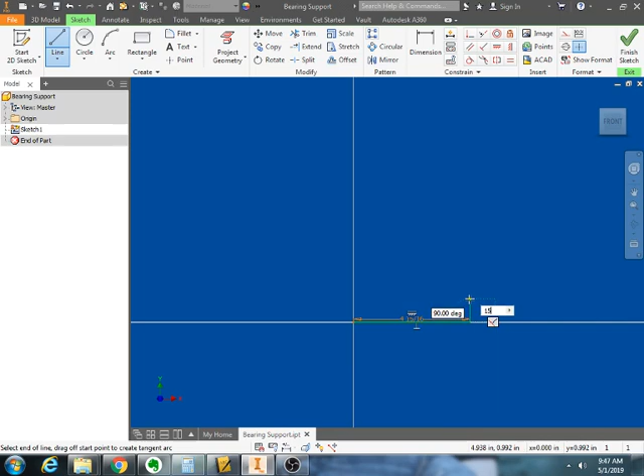I'm going to hit Start 2D Sketch. I'm going to click on this front plane. I'm going to start drawing. I always start from the center. It doesn't really matter where you start, I guess, depending on your work planes, but we're going to go this way to the right, 4 and 15/16. Zoom out a little bit. We're going to go up 15/16 and then back 1 1/4. So we're going to go up 15/16, back to the left 1 1/4, and then we're going to go up.

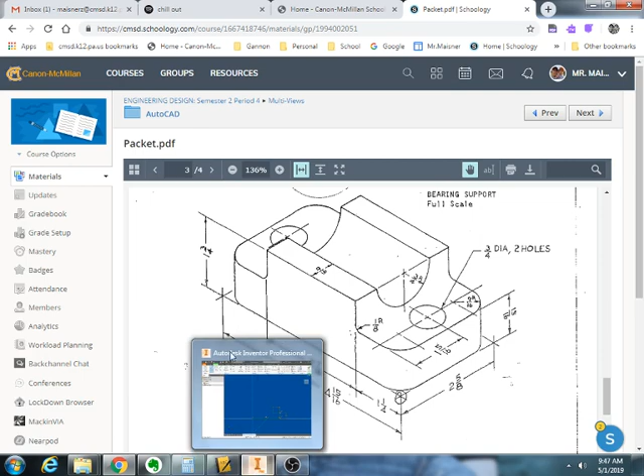As we go up, you're like, oh no, they don't give me a dimension. Well, they give you 1 3/4 here, 15/16 here. Hopefully you can do this in your head. If you can't and you don't have a calculator, Inventor does it for you. If I type in 1 3/4 minus 15/16, let's see what happens. Voila. It'll give you the measurement that you need, which is super helpful. Time saving, you know. So 13/16 is the next one.

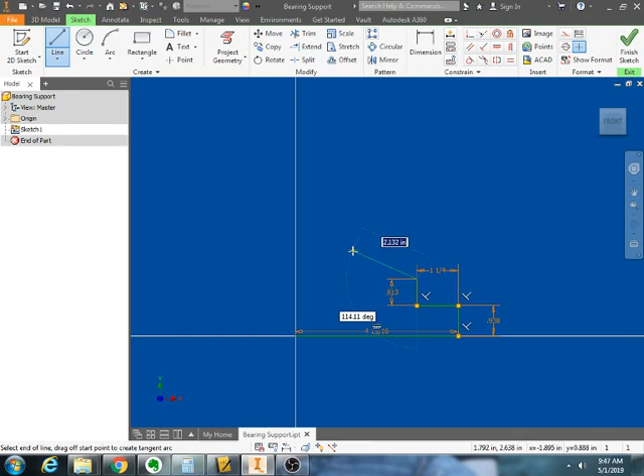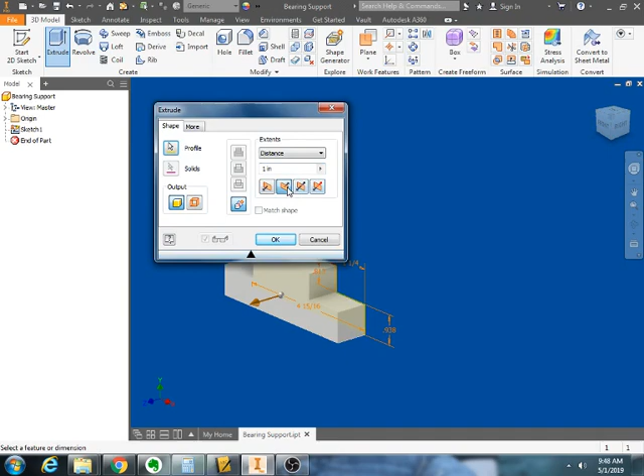So we'll go 13/16. Simply go down. Your polar tracking will stop you right here. We'll left click, left click, left click. Now I have this blocked out. I finish the sketch. I extrude the object back a distance of 2 5/8. So I go back 2 5/8. I did that kind of weird, but it went back 2 5/8.

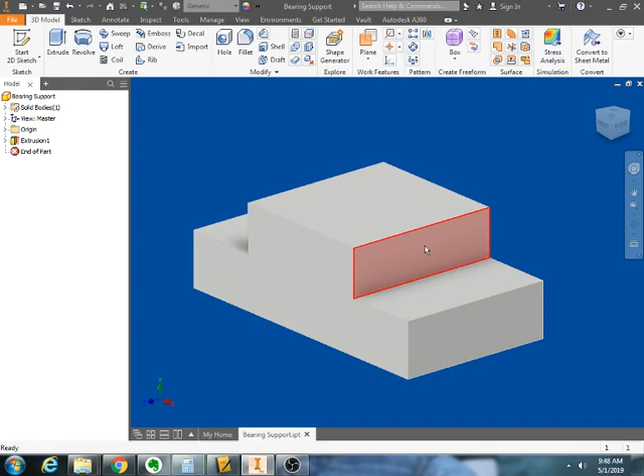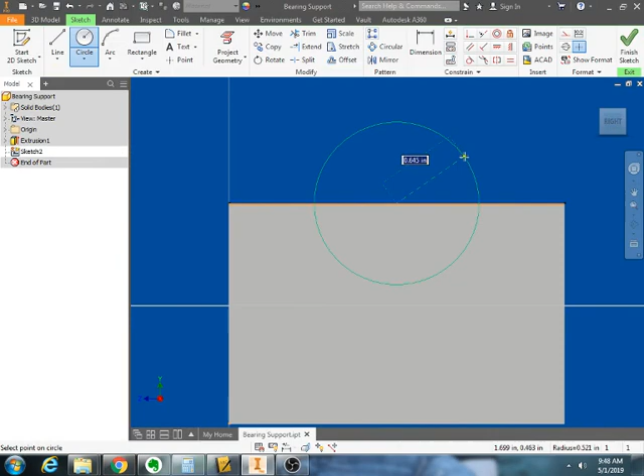Next thing you want to do is cut this circle out right here. So you want to get this 3/4 inch radius circle. It's on the center of your object. So I'm going to click on this work plane. I'm going to create a sketch. I'm in that work side. I'm going to hit circle. I'm going to go to the middle, and you see how it snaps to the middle, the dot becomes green. That's snapping to the center. I need a 3/4 radius. So I right click, get to radius, left click to accept that, type in 3/4, hit enter, and I can use this to

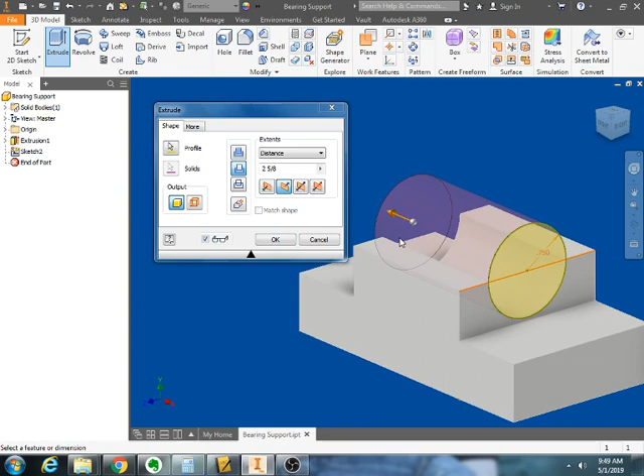extrude back. So I hit extrude, I select that face. Instead of adding to it, I'm going to use the cut option. So I cut. You can see it's starting to cut all the way through. You can leave it the distance, or you can just say all the way through, so you know it goes all the way through. Hit OK, and now I have this rounded edges. Alright, so now what I need to do is round these corners here and add these circles.

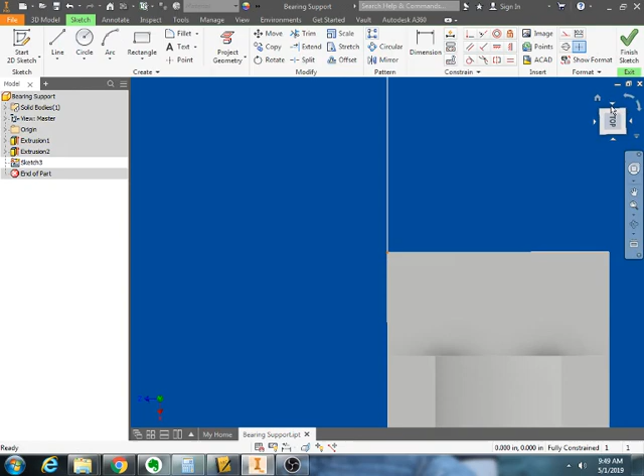So before we do the fillet button, let's just go ahead and add these 3/4 diameter holes that are 1 5/16 from the front and 9/16 in. So I'm going to click here, I'm going to hit create sketch, rotate it down, hit circle. I'm going to start here somewhere, it doesn't matter. My measurement is 3/4 inch diameter. Right click, go back to diameter, 3/4 there, come over on this side, 3/4 there, hit the dimension tool to tie it down.

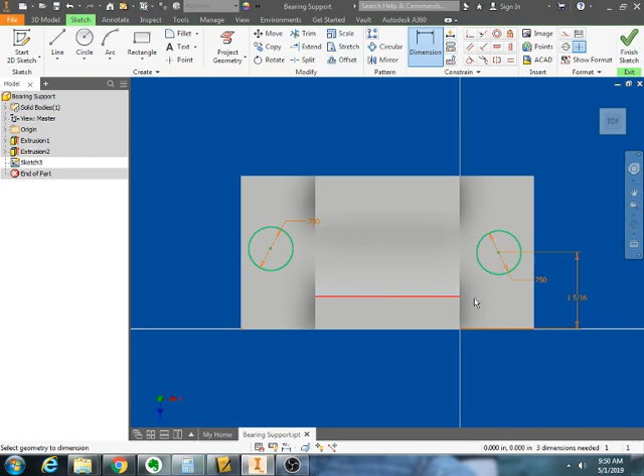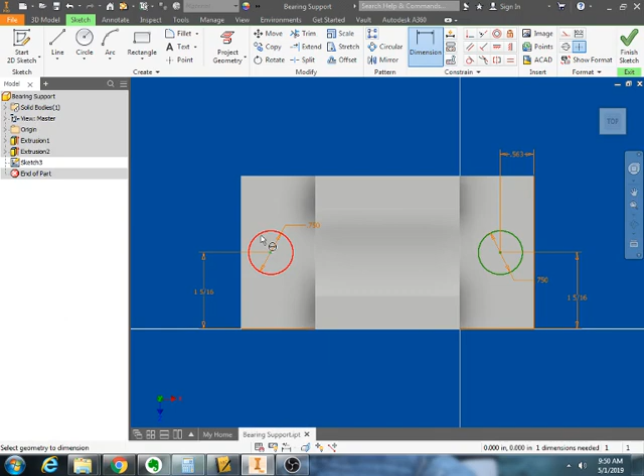Okay, so I want to go from the center, this circle, to the front. That I want it to be 1 5/16. So I change that to 1 5/16. Voila. You can click on the circle and click on the front. Oop, if you don't get it, click on the circle, click on the front. 1 5/16. A couple different ways to do it. And then to go in, I want to click on the circle and then to this edge, and that measurement was 9/16. Do that on both sides. Click 9/16, like such. Finish the sketch.

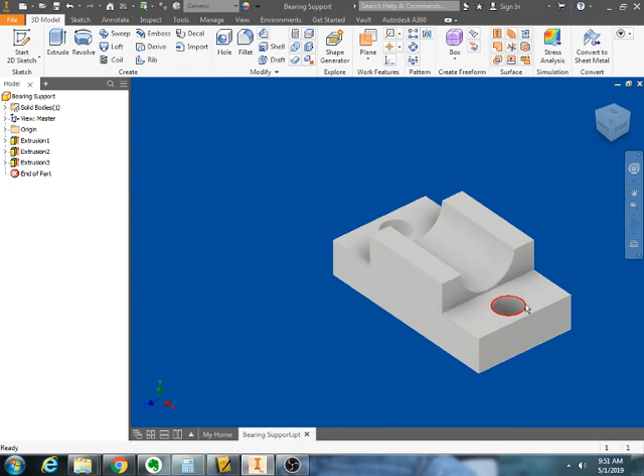Rotate it up a little bit. Extrude. Instead of adding like this, we're going to use this cut button. I'm going to change it to all. Hit OK. And now I have those holes. The only thing left to do is to round these corners with this fillet button. So the fillet button is right here, fillet. So you click fillet, you get a dialog box. There's a few options up here.

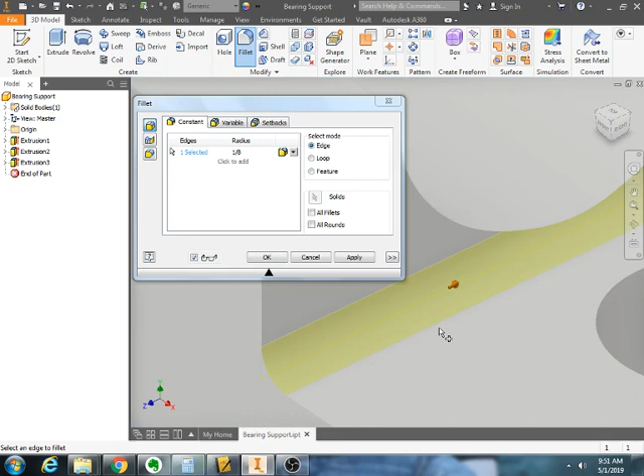I can talk about it at a later time, but we're just going to use the constant, which means you're going to do one edge at a time. Right here, one edge. Here's the radius. So if we change this to 1/8, and you look on your drawing, you have 1/8-inch radius fillets right here. You simply click on this edge and you can see it starts to make it round, which is awesome. So you can do one at a time if you want to practice. Hit OK. Flip your model around. Hit fillet. It still remembers 1/8, one edge. Click here. Hit OK.

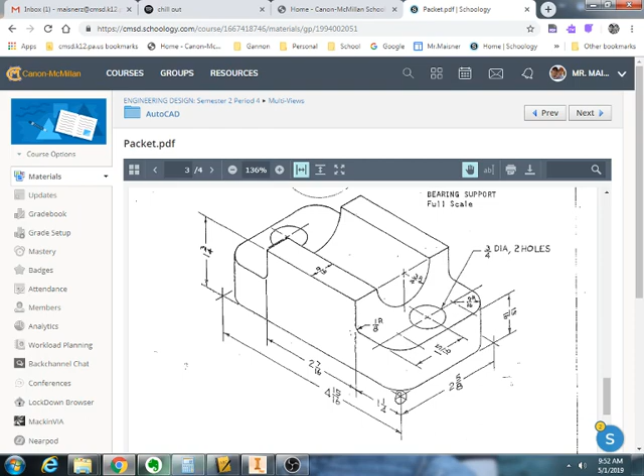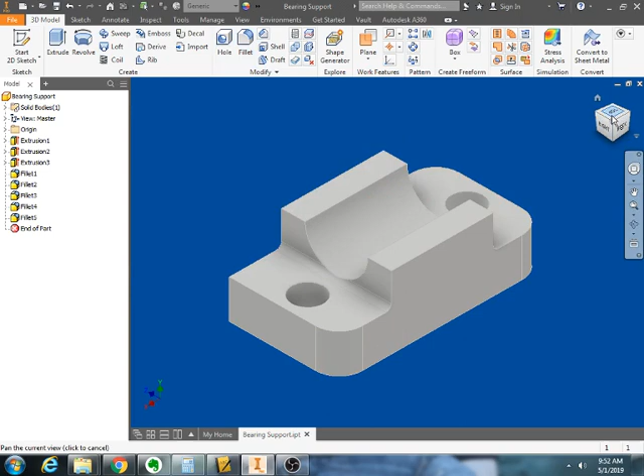The only thing left to do are these ones here on the corners. 9/16 right here. So let's go ahead and do those. Fillet. Change it to 9/16. Click on this rounded edge here, hit OK. And if you want, you can do all four, or you can simply do them all together, but let's just do one at a time for practice. It's still remembering it from the last time. Then one last fillet here, and there you go. You got your bearing support. Go ahead and practice that one.